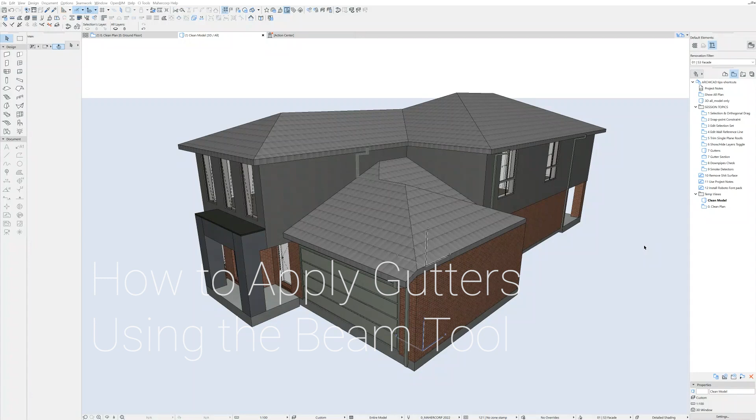On Thursday, we looked at how to apply roof gutters using the beam tool and a complex profile. To review that, beam tool, complex profile, select the right profile. We want gutter and steel fascia with 450 eave for an EPS wall. The first floor roof is a multi-plane roof, which makes it easy. All we need to do is find the top edge of the roof composite, magic wand, and the beam is applied.

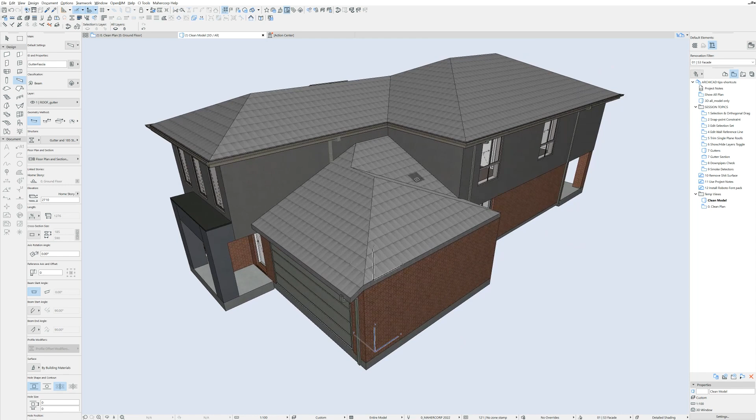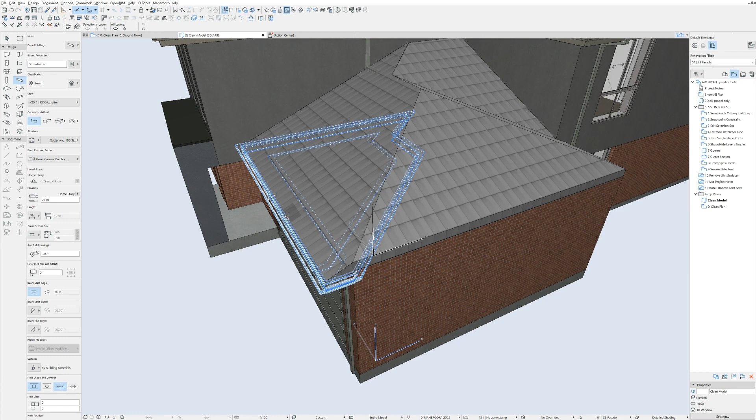Marnie asked the question about how we manage the situation where you've got a garage like the one I've set up here with a 450 eave to the front and a flush gutter to the side. It's also complicated by the fact that this is a single plane roof. If we try and use the magic wand and our beam on this roof, it wants to put the gutter all the way around the edge of the roof, which is a bit of a pain. It also doesn't follow the angle of where we need to run the gutter up the side of this angle here.

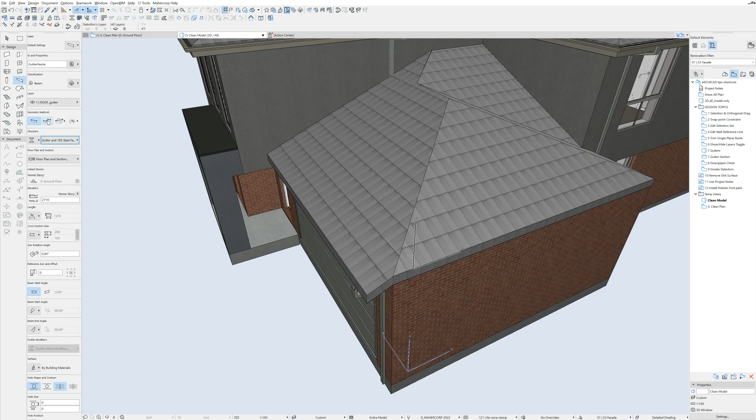You can do that. I tried that, and you put it on and then they connect up and you can delete all the extra ones, but it's not the best way. A better method is, first of all, to change to the correct gutter. We want one with no eave here because most of our gutter that's going to follow around here is with no eave. Use the chain method of applying the beam. And then the most important thing when you snap your way around is to wait for that little blue circle to appear on the snap point that we want. Hover over the correct point, wait for the blue circle, and click. Work your way around to the extent that you need the gutter.

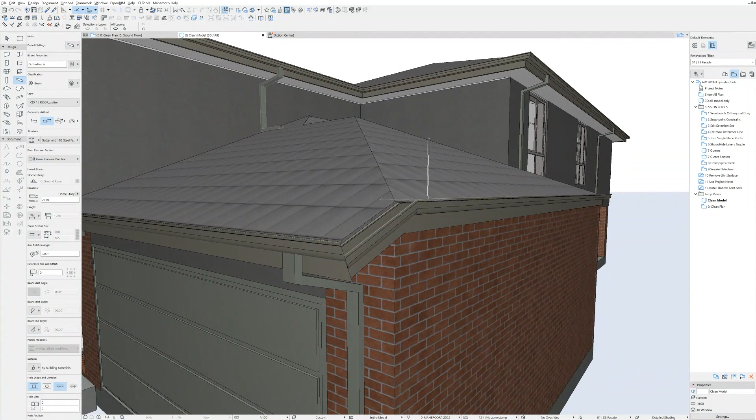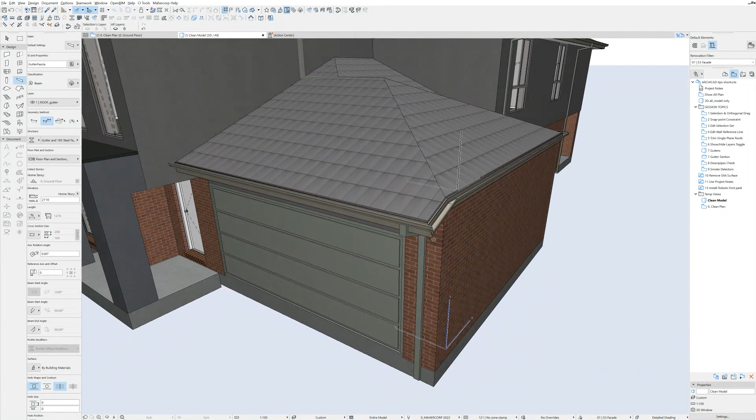And we're good. Our problem here is that an angled beam doesn't connect well to a horizontal beam that's perpendicular to it. It cleans up nicely when it's in the same line, like here, but not when it goes around the corner. If you're in a real hurry, you can probably get away with that. It's not the end of the world, but it's also not the best. There's a better way to do it, which is really not much more difficult. Same thing, wait for the circle, click,

click. Now, this time what we want to do is a small section where we run around the corner horizontally. You can see here, I've just gone around, so it's more or less horizontal, but that slant angle, if you look at the tracker there, is 0.73, and that's not going to work. You can muck about and try and catch the correct x-axis, but I find that that can be tedious and difficult. It's easier in this case just to type the coordinates in.

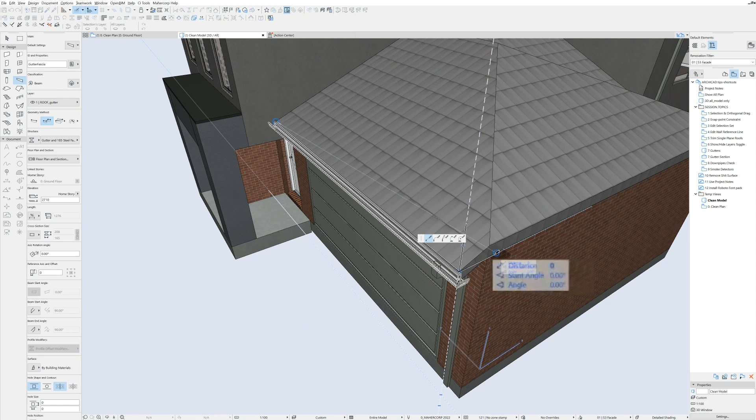So tab to our distance, we only want to return 10 millimeters. That's enough. Tab again to the slant angle, type in 0. Our angle is also 0. Return, and then we've got our gutter returning, which is going to clean up that connection. Now you can go back to snapping the points, hover over the correct point, wait for the blue circle, and click.

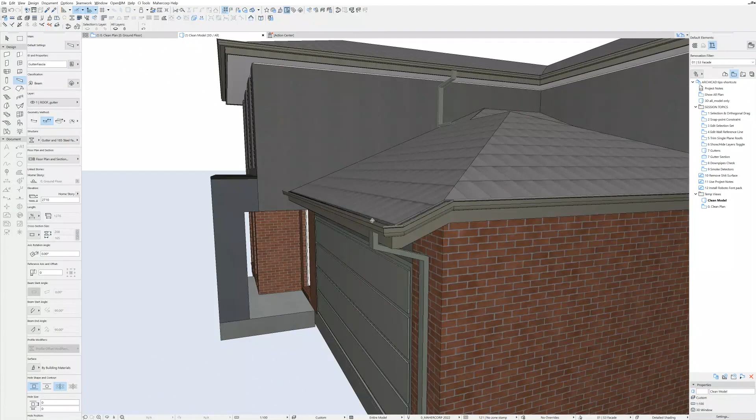And now we've got our gutter applied with a nicer connection. You can do all this in 2D, but there's a lot more cleanup to do once you put it on because it doesn't snap to the correct heights. It's easier to track around the points in 3D as long as you wait for that snap point and then type in the coordinates when you need to going around the corner. And then you have a clean gutter.